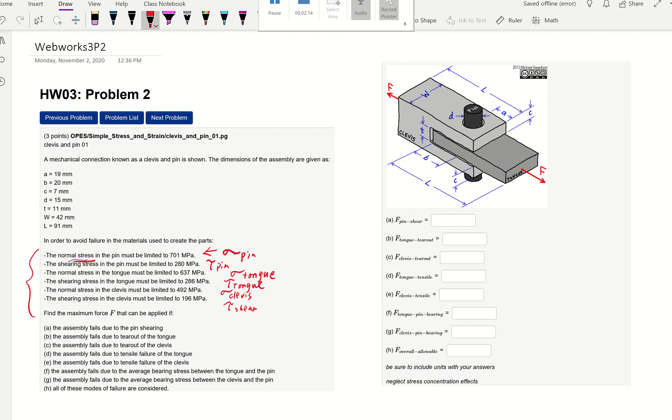I can even go ahead and put my values here. That just helps me solve the problem later. And they all have the unit of megapascal. Okay, so I encourage you to do the same.

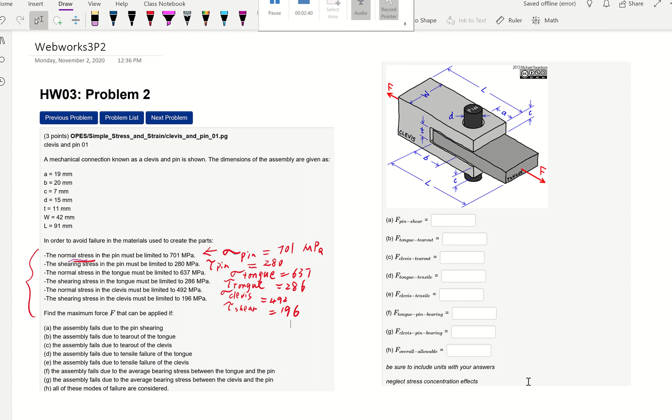So now the first problem is A, corresponding to this question, assembly fails due to the pin shearing. Okay, so the best way to solve this is actually thinking about a couple of things. The first one is the pin. We are trying to isolate the pin out, and it has to be shear.

So if I were to draw this top clevis, and here is our bottom one. And the pin, that's what we're interested in. It's right here, curved right here. And we have external force F to the left because I'm only looking at the left. So I have this pin going through right here.

And like we said, it's going to be pin shearing. Shearing is going to be parallel to this force, so it will have to be lateral, left and right. So at the pin it will have to be this black surface right here. And there are two, top and bottom. And then this is one shear, and there's another shear, V.

So in that situation, you identify two things. First thing is this shear is going to be equal to F/2 for each one of them. So if I were looking at one of the forces, F/2, that corresponds to only one surface area right here. And this is a circle; if I were to draw this area, it's basically the circle with the diameter d. So it's pi d squared over 4. Okay?

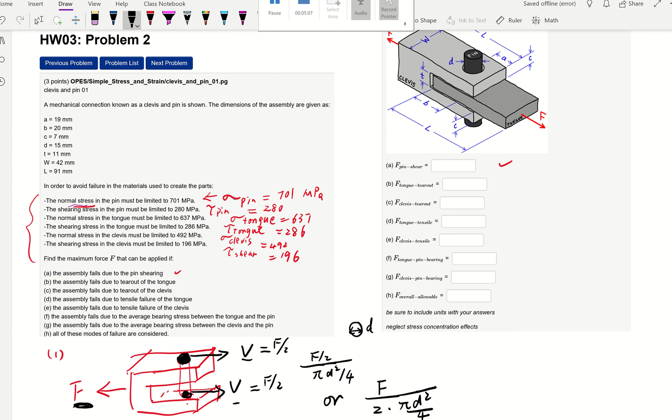Or what you could write is, okay, I'm going to consider these two shear forces together. Then they have to be equal to this external force F. However, now I have two surfaces, right? So basically two circles. And two circles will be pi d squared over 4 times 2. In that situation, those two equations are basically the same, right? Okay, so then they both are going to be equal to what?

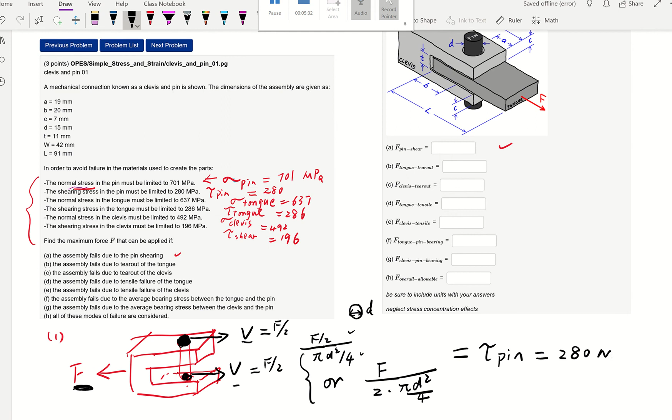This is shear force over the area. So that's going to be equal to the shear stress. So that's going to be tau of this subject, which is our pin. And for this situation, it's 280 megapascal. Now let's think about the unit. You notice all the dimensions here are in millimeters.

We talked about this in the previous video. If the force unit is Newton, and area is millimeter square, because the dimensions are in millimeters for this problem, then what do we get? Millimeter is going to be 10 to the negative 3 meter, squared. So you have Newton over 10 to the negative 6 meter square. Flip that up, that's 10 to the power of 6 Newton per meter square. That's basically 10 to the 6 Pascal. And that is our megapascal.

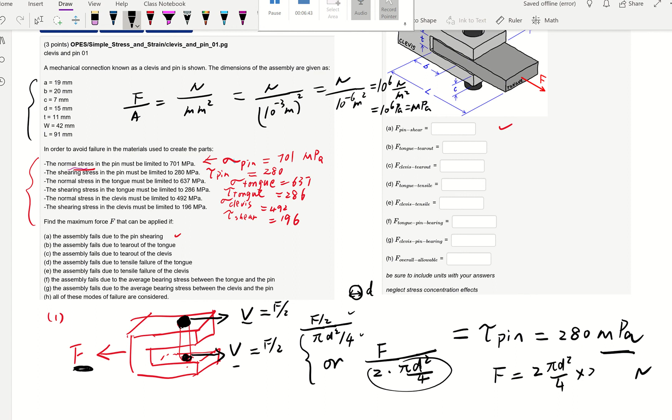So this makes things really easy for us, knowing that, because if I get megapascal and I'm using the dimension here using millimeter, then I am destined to get my force in Newton, right? So in order to solve this equation, F is going to be equal to 2 pi d squared over 4, then times 280. That's going to be my answer for that. Go ahead, pause for a second, see what you got for this.

So here is my answer. I got F is 98,960 Newton. So that's the first answer right here, 98,960 Newton. That is the maximum force I need to prevent my pin right here from shearing. So that's the first problem, okay?

Now let's look at the second one. The second one is assembly failed due to the tear out of the tongue. So let's look at it. So the tongue is right here, this rectangular prism, and it's tearing out. So if I were going to draw my tongue out, this is the tongue, and when we isolate that out, we know there's external force F to the right, and again there is a pin going through, so there's a circle.

It's tearing out. Thinking about the motion, if this tongue is going to be tearing out, it is going to go through this path, right there and right here. Then if we were trying to draw that, this is going to be the first surface, and you're going to have exactly the same surface to the inside. So you will basically have this rectangle if we were taking it out. And this tearing out with respect to this surface is going to be parallel. So that's going to be your shear. On both of them, it's going to be shear, and each of them will be equal to F over 2.

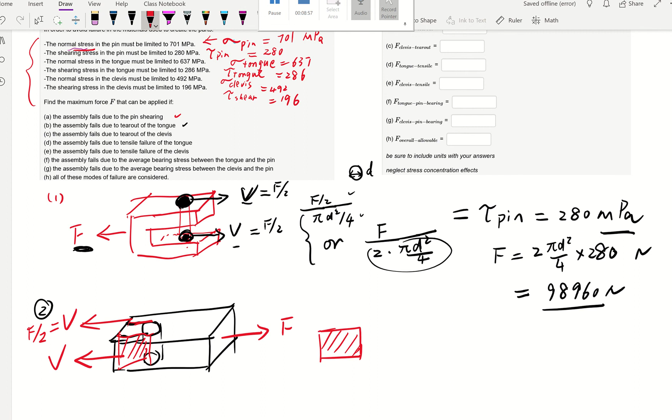And then if you look at one rectangle, let's look at the dimension. What's the dimension right here? So let's go back to look at it. The dimension right here is going to be B. And the height is going to be basically the depth of the pin that is inside of the tongue, which happens to be your T.

Okay, so in that situation, if I were trying to draw, this is going to be the first, the inner surface, and then you have another surface. They are both going to counteract this external force. So knowing that, we already know the shear force is going to be F over 2 for each of the surfaces, and each of the surfaces is going to have the area of B times T. And again, this is shear, so it's a tau. And this is the tear out of the tongue, right? So we're looking at the tongue shearing out.

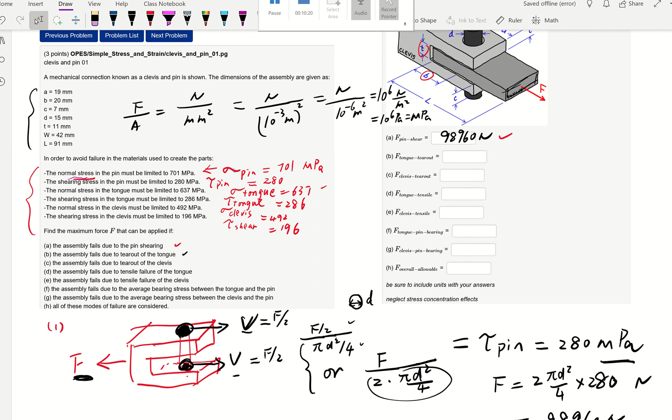And let's go back to look at what we have. It's 637. Oh, I'm so sorry. This is a pin. Tearing out of the tongue, it is this one, 286. Okay, it's 286. So knowing that, go ahead, you can solve your F. F is going to be 286 times your B times your T and times 2. And my B and T are 20 and 11 respectively. So put all those in there, we can solve our force.

That is 125,840 Newton. So go ahead and pause to check the calculation. So this is basically the maximum force that is allowed to prevent this tongue from tearing out. Again, this tearing out is going to be shear, right? Thinking about it, it's going to be parallel to those two surfaces.

All right, so let's look at problem C. It is assembly failure due to tear out of a clevis. So the clevis is this U shape. So if we were trying to go ahead and draw out this U-shape clevis, what do we have? It will be something like that, right? Again, you have this pin on the top and the bottom. And now we're going to look at this external force to the left, basically this force right here.

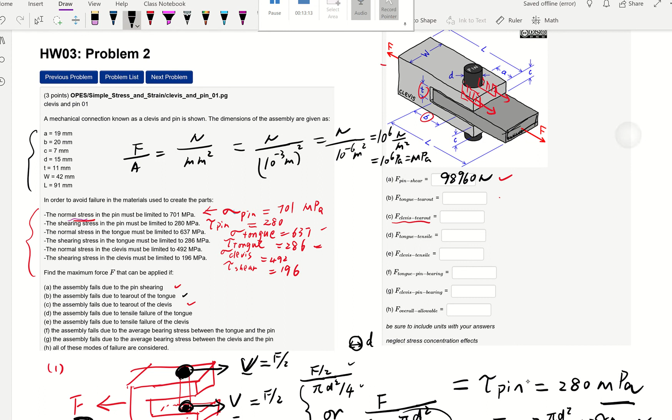So that's going to be top and the bottom. So there are a total of 4 of this surface area. Okay, and now let's look at the dimension for this surface area. And what is going to be the depth there? The depth there is going to be this value. That's going to be your C.

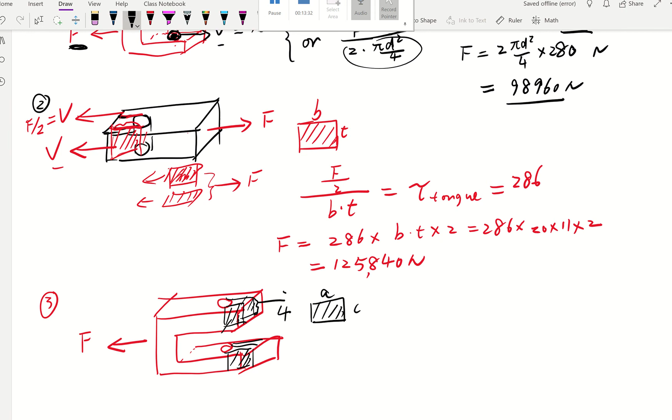And what is the tear out path? Basically from here to here. And that's giving us A. So it's A. Okay, so those 4 surfaces, they are going to be identical, and they are also going to have identical forces, which is going to be F over 4.

And that's your shear. But in order to solve this problem in one simple step, I could say, okay, all those 4 shear forces together have to counterbalance this F. So that's going to be F. And then, however, it's going to be 4 surfaces, right? So in that situation, I'm going to have 4 times A times C.

Or you can say, how about we look at one individual rectangle area? Sure, we can. Each one is F over 4, and each one of the surfaces will be A times C. And you notice that they're the same. All right, so that's going to be equal to shear tau, but this time it's going to be clevis. And our tau for clevis is 492. Write this value.

Then go ahead and we can solve this F. F is going to be 4 times A. A for mine is 19. And C is 7. So 4 times 19 times 7, then times 492. Did I get this right?

Tau for, oh, I'm sorry, I keep on getting the wrong value. Tau for shear is 196. Oops, 196. So here is 196. So go ahead and solve that. We'll get 104,272 Newton. Okay. All right, so that's the first three.

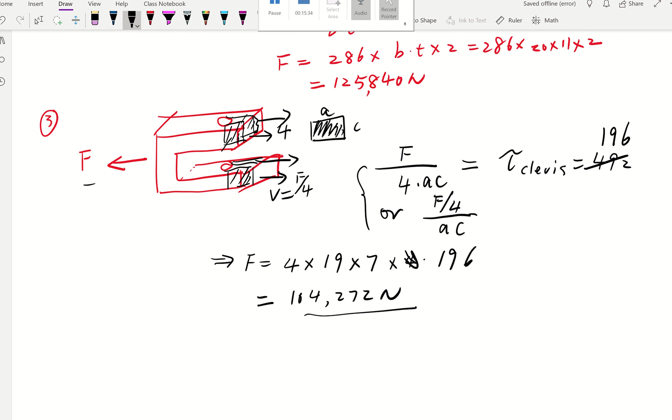Now let's move on. By the way, what does this value mean? That's the maximum force allowed to prevent this clevis being torn out. Basically, reaching its maximum shear stress. Now, let's look at problem 4. They said the assembly fails due to tensile failure of the tongue. Tensile, that's going to be normal now, right? So the first 3, you notice it's all shear.

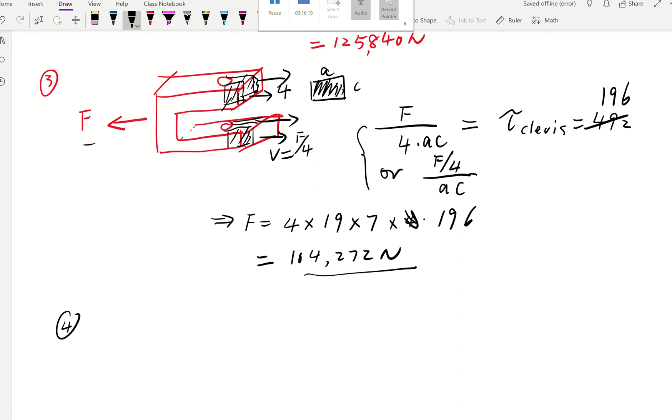Now let's look at the tensile failure of the tongue. The tongue is this one right here, the rectangular prism. And we're going to consider this is going to have a normal stress, normal force. So first of all, we go ahead and draw the tongue. Okay, and then again, remember this tongue is subjected to this external force. And again, you have 2 carved circles, one on the top, one on the bottom.

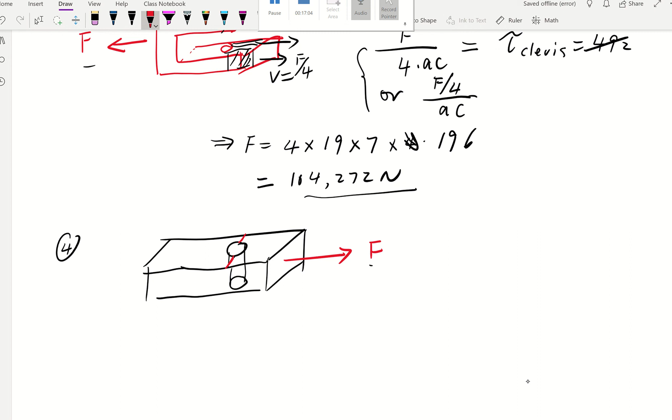And this time, we're talking about normal. Okay, the normal, the failure due to tensile of the tongue. So tensile, normal, has to be perpendicular to these forces. In order to make it perpendicular, the first thing you can think about, and it has to be inside the tongue, so it will be here. Those 2 identical rectangles, they are going to have identical force, and that's normal force. And they are both equal to F over 2.

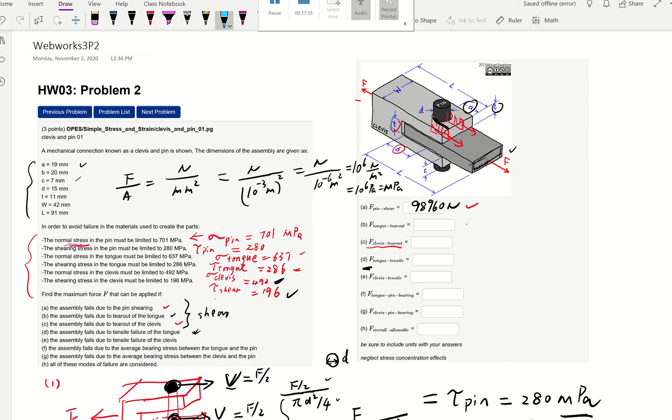So if we were trying to dimension this rectangle, let's look at it. What's the thickness of the tongue? The thickness of the tongue is T. So let's translate this to be T. And how about the dimension here? So in order to solve this one simple way, I can just say those 2 combined normal forces have to be equal to this force.

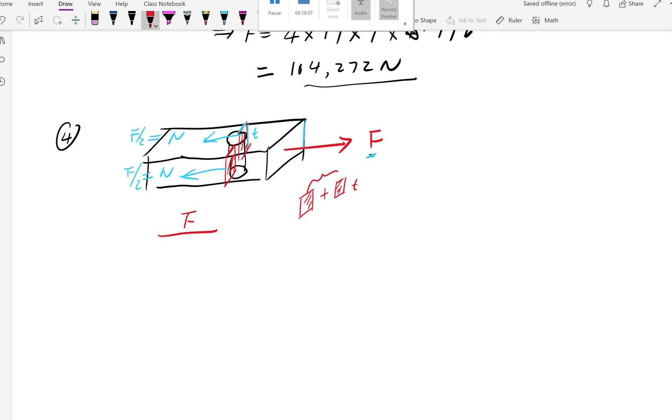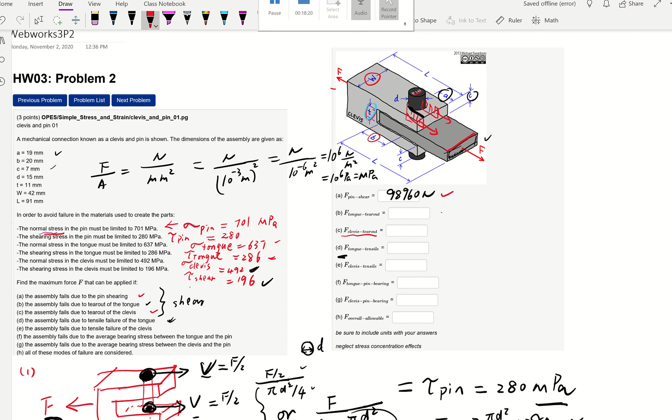So that's going to be F over this combined surface area. So it's going to be a rectangle. So it's going to be this surface plus that surface. And this is T. How about those 2 surfaces added together? We know the dimension for this. This dimension is W. And we know the pin has D being a diameter. So translate over here. So that's going to be W, and this is going to be D.

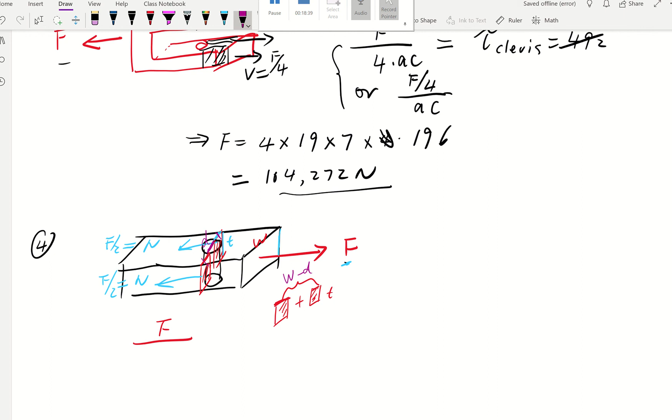So knowing that, all those together, this plus that is going to be W minus D. Okay? So knowing that, you put 2 rectangles together, add them up, it's a big rectangle. So the dimension is W minus D times T.

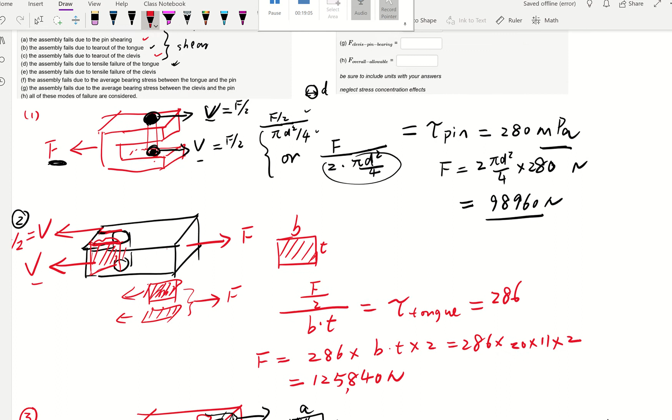Then this is going to be, again, it's normal. So it's sigma, and now we are looking at tongue. Now go back to look at sigma tongue, it's 637. So put that in as 637 and put the dimensions for W. My W is 42 and my D is 15. All this together, then times the thickness, which is 11.

So putting all those in, we calculate our force as 189,189, an interesting number. So that's my force, and that means this is the maximum force allowed to prevent the tongue from having a tensile breakdown, right? Being broken on this surface here.

Because why do we consider this surface? You said, oh, why couldn't we consider this surface? Yeah, that's also perpendicular to this surface. However, this has a way bigger area. If this tongue is gonna break due to tensile, it's gonna break at the minimum surface, right? And the minimum surface is where the cylinder of the pin is carved out. So it's gonna be those two areas.

Okay. Now let's look at problem 5. Problem 5, it fails due to tensile failure of the clevis. So the clevis is going to be that U-shaped one. In order to do that, we go ahead and draw the clevis so we can think about it. So this is our clevis. Again, our pin going through them. The external force this time is going to be to the left.

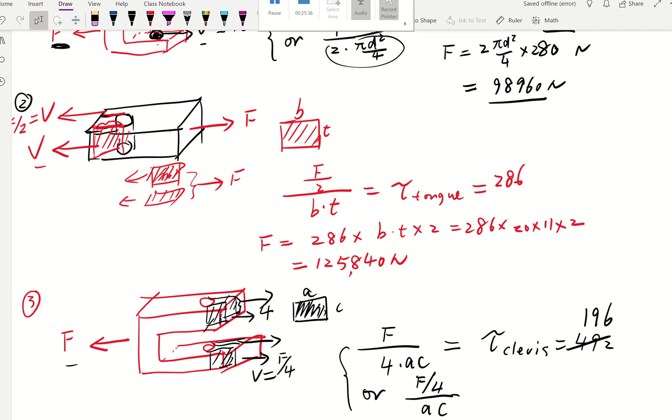Okay, so in order to do that, we're going to draw our tongue and this pin, and we have the external force F here. Remember, this has to be bearing stress. Bearing stress has to be normal, so it has to be perpendicular to this force. Perpendicular, then we'll have this. Maybe I should draw better.

Yeah, that's better. So it's gonna be this. That's gonna be the surface that's perpendicular to this force. So that's gonna give us also F. That's your normal force. And this surface is going to be diameter D for this dimension, and this is thickness, that's T.

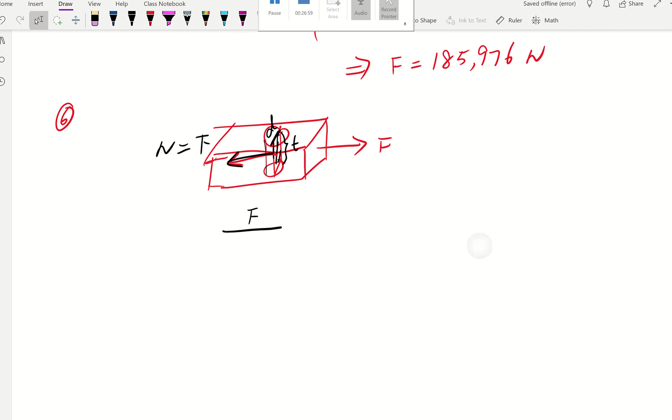So knowing that, the bearing stress we are solving is going to be force, normal stress over dimension, D times T. And here, since there are two materials, one is the tongue and its normal stress, and another material is the pin. So which one do we use? Here is simple logic. We're going to use the minimum, right? If something is going to break with those two materials in contact due to the normal stress, it's going to break at the weaker material. So you're going to use the minimum one, always choosing the weaker material.

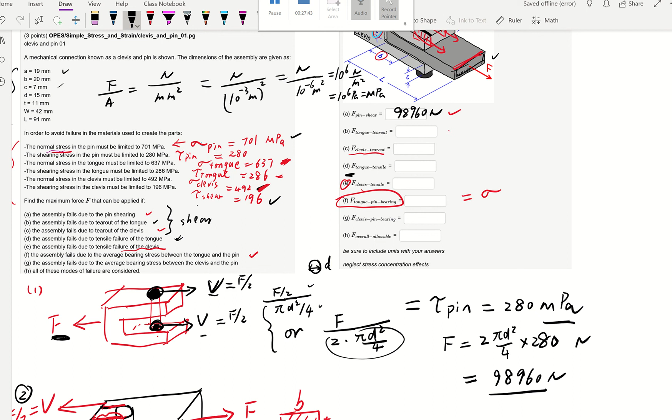Now let's go back to look at this problem. The tongue and the pin: normal stress for the pin is 701, and for the tongue is 286. So obviously we're going to choose the small one. That's 286, and that's our logic here. We're going to use 286.

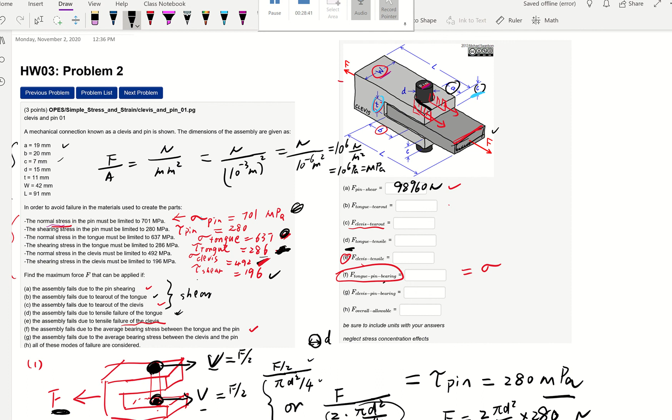Okay. We're solving 6. I'm just trying to be clear. Let me see, go back. The 6, oh, it's tongue. Yeah, okay. So we're using 286. Sorry, I made a mistake. I was getting the shear. So it's not 286. For the tongue it's 637, compared to normal stress for the pin, 701. So we're going to use 637. Okay.

So now we're going to put our dimensions there. Our D is 15, the diameter of the pin, and the T is where the pin is going through, and that's 11 right here. And that's going to give us 637. Then from here, we can solve our force in that situation. What do we get? We get 105, 105. Another interesting number.

All right, so let's look at the next one. They're asking about the bearing stress due to failure between the clevis and the pin. So it's very similar to problem 6, but now we are not looking at the tongue, we are looking at the clevis. So if we were trying to draw the clevis right here, okay, then again, you have circles, and we have external force F going to the left, and this is bearing stress. Bearing stress is going to be the contact area, so it will be right here. So the only contact is going to be this top surface and also this bottom surface, right? We're not going to look at the middle because they are not in contact.

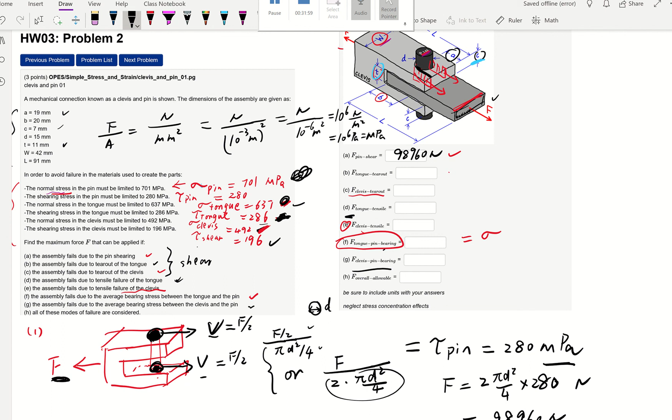So the normal stress for the pin is 701, and for the tongue is 637, but we're looking at the clevis. The clevis is going to be 492. So we're going to use 492 for this.

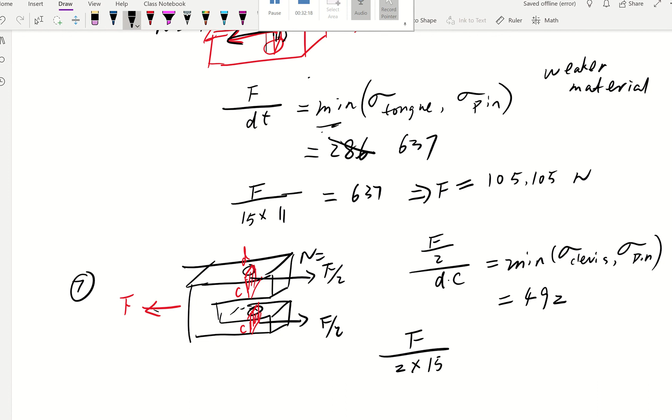Okay, so put our values in. So F over 2, our D is 15 millimeters. Our C here is 7. All those together equal to 492. Then put all those values there. You can solve for force. That's 103,320 Newtons. So what does this value mean? This value means if you're not going to have this contact area, which is bearing stress, fail, then we're going to have a maximum force of this value. Okay.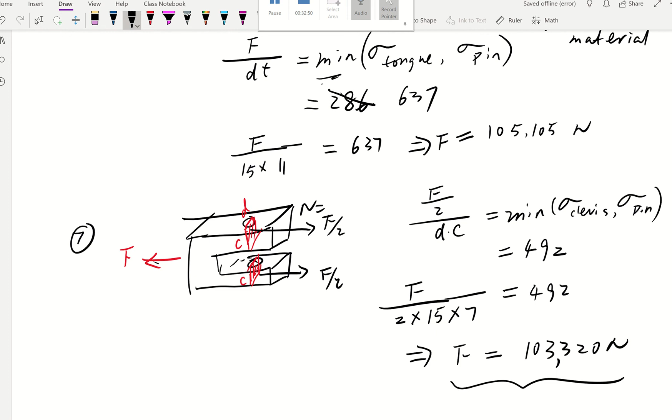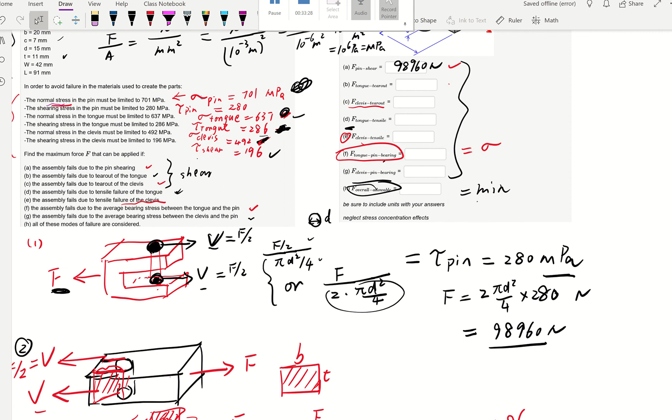So the very last one is asking overall allowable. What do you think? You got how many numbers so far? A, B, C, D, E, F, G. My goodness, you got 7. So all those are maximum numbers to prevent something happening and to avoid some kind of engineering disaster. You want to have this overall allowable to be what? The minimum of all the numbers you found. The top 7 numbers you found. Then that's the answer. All right, so hopefully this was informational and that gives us an idea how to approach a problem like this.